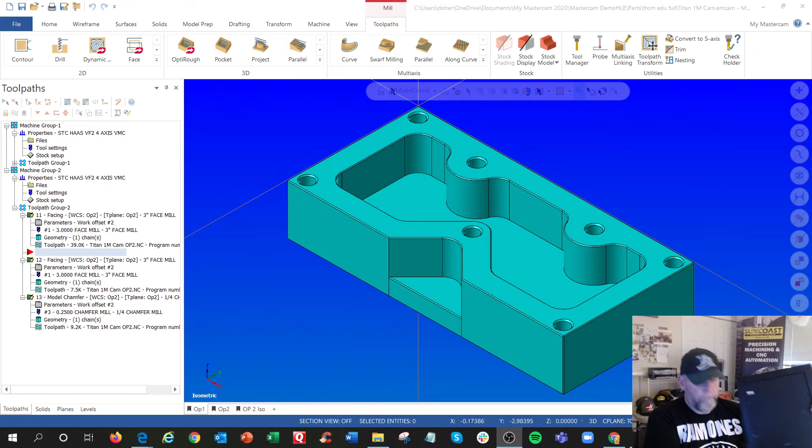I have a Tampa Bay Rays hat on. This is in the transition year when you're going from the Devil Rays to the Tampa Bay Rays. Anyway, you may notice my Ramones shirt. Big fan of the Ramones, seen them many times. Actually got a nice autographed picture, cover, Ramones. Got some other pictures up here. I'm also a drummer, got some Marky Ramone drumsticks right here. I'll do some drumming later.

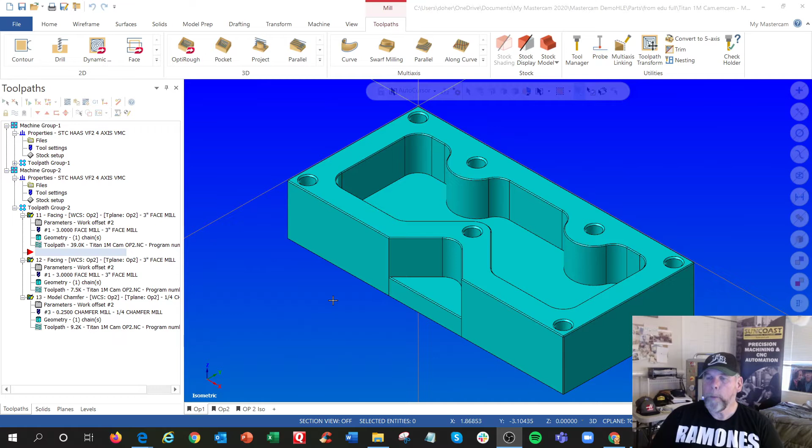But anyway, we're here to talk about machining. This is Mastercam Home Learning Edition 2020. I previously have done this and have a video before. I did the CAD, I did the CAM, and I was trying to do better simulation.

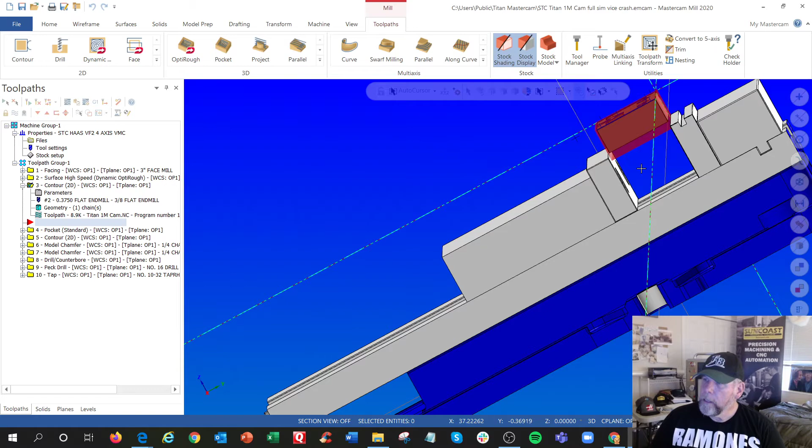So I brought in a vise. This is the actual Kurt 688 vise that we use in our school, D688. Took me a little while to figure out how to get the stock in the right place and the part in the right place, because I wanted to be able to do full simulation and talk about things you want to look out for.

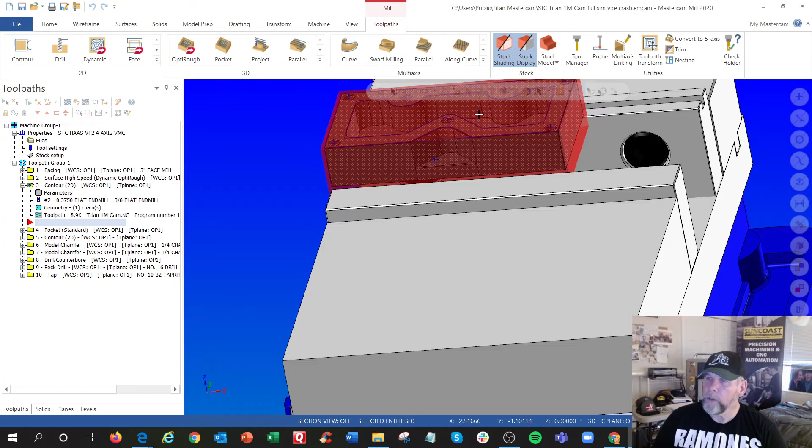In these simulations, you can really talk about what you're trying to do. This is the first operation, where you can see that the red material is the stock. We're just having a vise to hold it in there, and we throw it in the mill. We want to line up that jaw with the x-axis, which is pretty typical in a vertical mill.

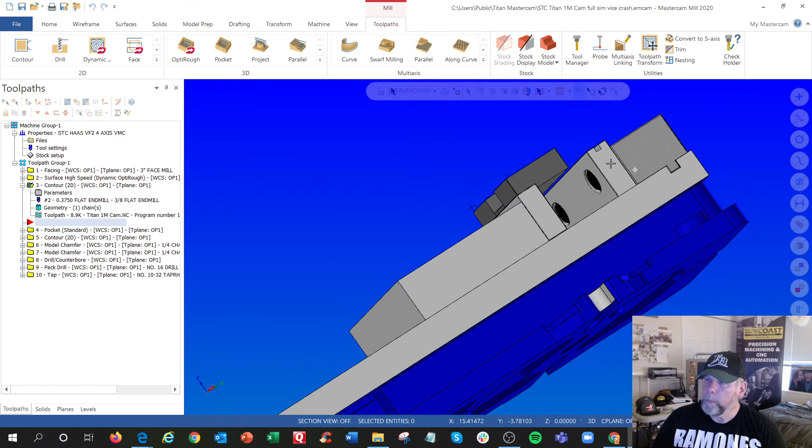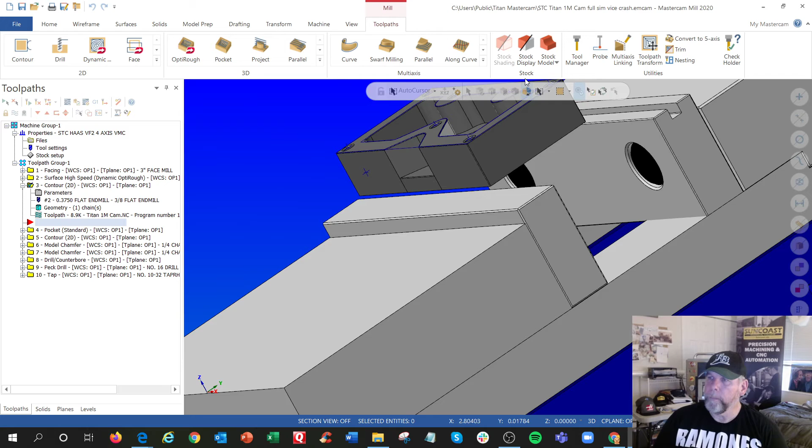In this case, the big transition from manual machining to CNC machining was that manual machine guys used to machine the whole outside and then work on the features. I forget the exact term for this, but we're using oversized material and cutting everything we can while holding on to the bottom. That is represented by this shaded material right here.

In Mastercam you set up those parameters right here, and you can put solid or wire frame just for reference and for simulation. On this one I used bounding box or all entities to get a rough idea of what size stock is, and I put some oversized material in here. I wanted it to be something you could buy in bar stock, 2 inch by 1 inch, which aligns with all the Titan projects, most of them. The extra 0.1 represents how much we're cutting off on a saw.

We shifted the x-axis, using this upper left corner. You can actually move it to any corner you want. Using the upper left corner, we're shifting it by 50, 50, and 20, and that would align with Titan setup sheets.

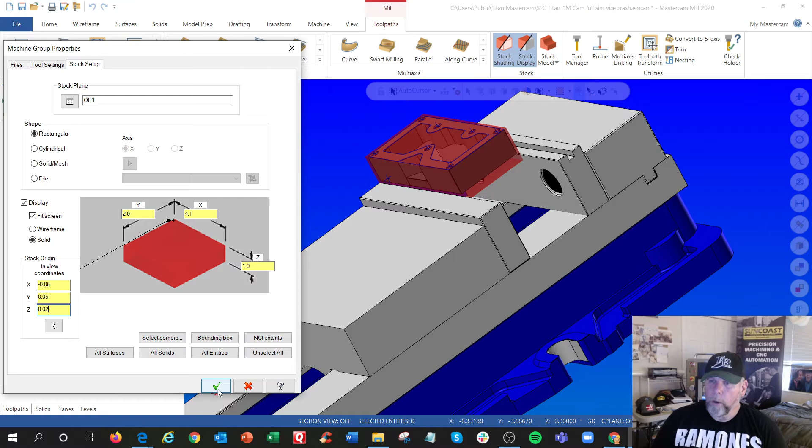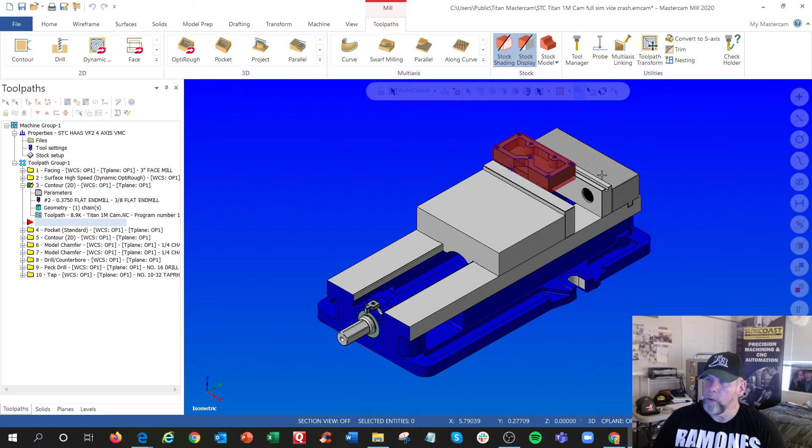So let's go back to this one. If you go back to the original, we're programmed off the model, or the solid model, and you're going to find this outside line with an edge finder or probe, and you're going to have to shift it in by 50 thousandths. But that's all on the setup sheet. However you program your parts in the future, you may do it differently. Some people program it so that you just do it off the material with no shifting.

So that really only applies on the first operation. When you get to the second operation, you have to be lined up with the finished product, or you cannot be that accurate. Okay, so I got the vise in here, got it all set up, and I was going to do some simulations.

So up in here we have backplot, verify, and simulate. I was actually trying to run this machine simulation over here because I was playing around with some 5-axis machining, and I don't have a 5-axis machine, but I want to learn, and you don't need a machine to learn it.

Backplot is like a quick simulation right up here, and there's a little press play button, speed button right here. Right now I only see one green stripe, which tells me I only have one folder clicked. So if I click all these, I get all operations. Let's try that backplot, which is also up here. Hit backplot, and then you see your face mill right there.

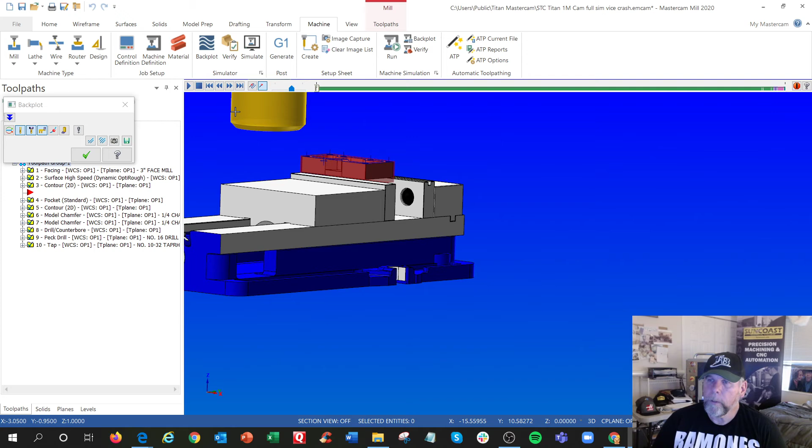I hit play, we start cutting away there, so we can look at it. This is like a quick way of looking at whether it's cutting in the right place. The yellow lines represent rapid movements. Looks pretty good to me.

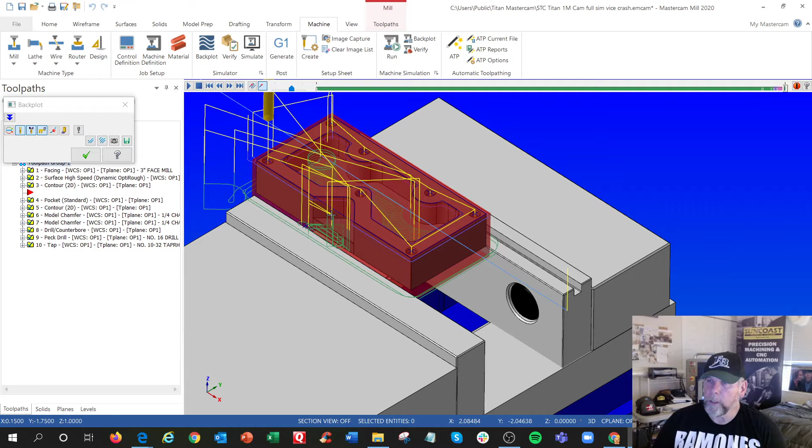This is pretty much what we used to do with just sketches or wireframe, no solid, in the old days. Now with solid models, you have a better representation of what it's supposed to look like. Only, is this a good setup? It looks like it's good.

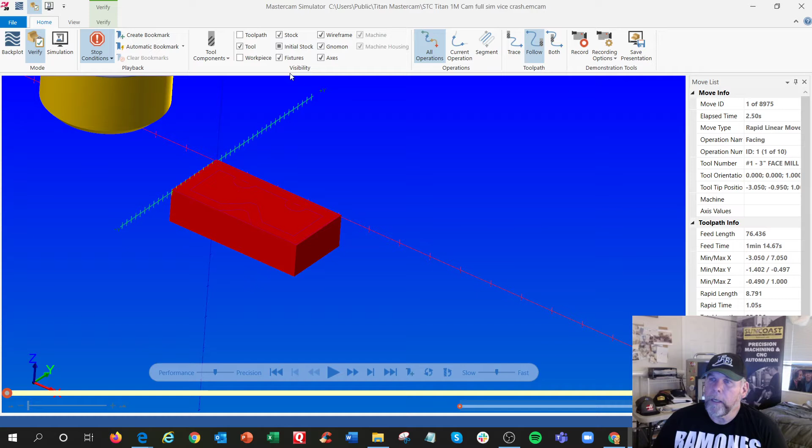So let's go to verification. Now verification will open up a separate window. I'll bring it over in the picture here. I have stock, tool, it says fixtures but I don't see it. Anyway, we hit the play button, and I'm going to turn on color loop, which will show colors for how long each operation takes, and they'll all have their own color.

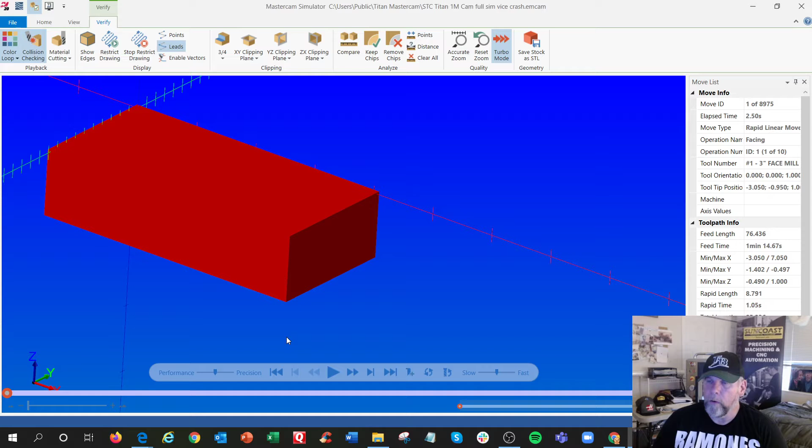All right, I have this set up. Let me turn off some of these stop conditions. Okay, I'm going to rewind this, hit play, let it cut, right?

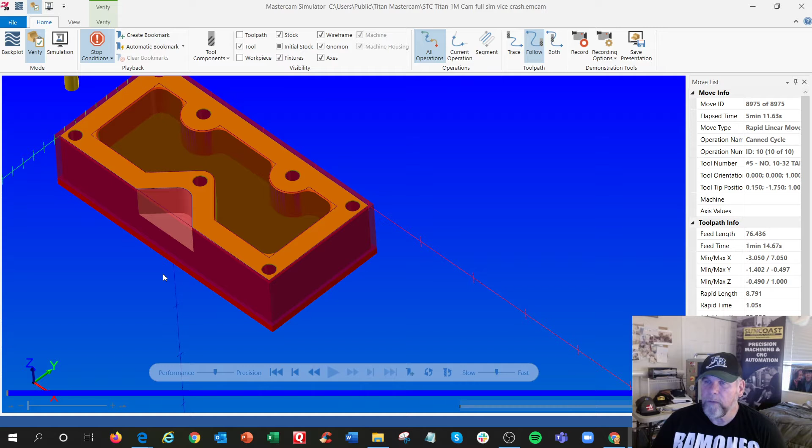You can see the wireframe boundaries, you can kind of get an idea. That was kind of fast, so let me rewind this and put the stock off. I'm going to slow this down, slow. Play again, okay, that's still pretty fast.

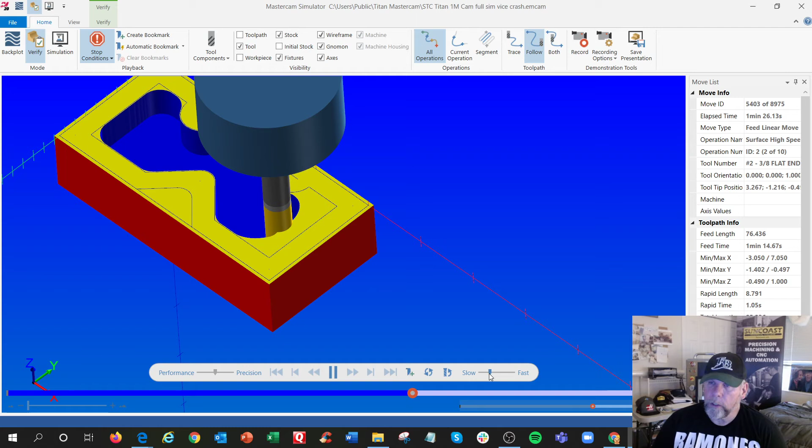All right, so you can really see much better how the cutting goes versus the quick verify method. You can actually see it's cutting. Looks pretty good. You can see down here the extra material, and when we flip it over we're going to be machining that off and chamfering it on this particular operation. Some operations may need more work.

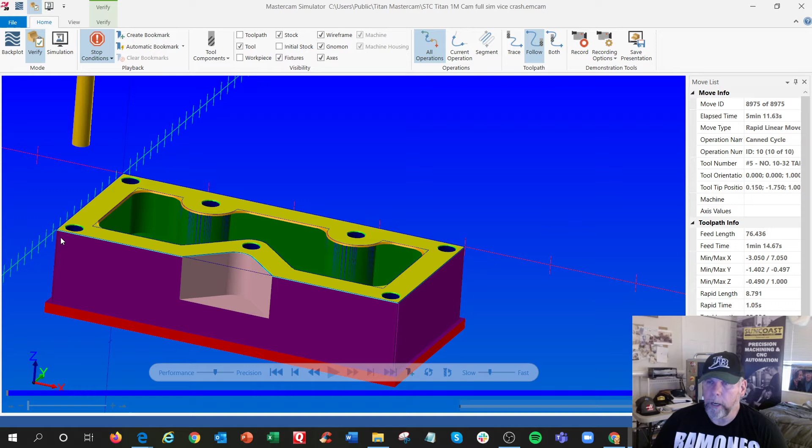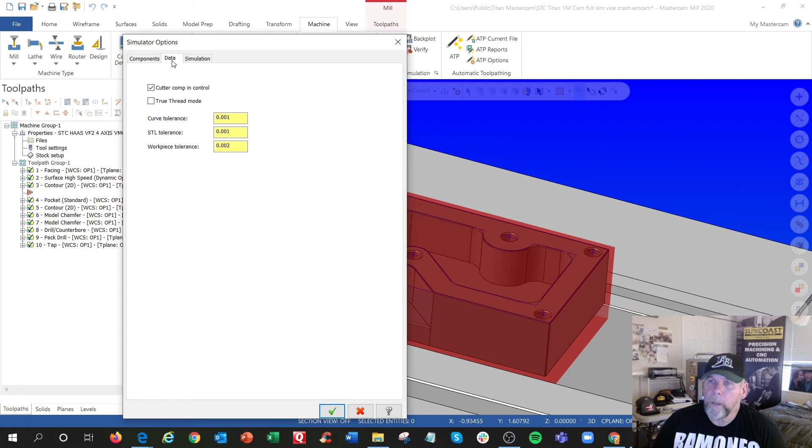Let's do a machine simulation. In this one you actually have to pick a machine. We picked this 4-axis VMC. I originally had a 5-axis in there for my other learning, so I picked this 4-axis VMC, cutter comp in control, and the fixtures.

Let me see, I've got to set some of this stuff up. Fixtures are gonna be, I should have combined all these levels. Bing, bing, bing. Oh, you know what, I could have done it an easier way, but I'm almost done. Done, okay.

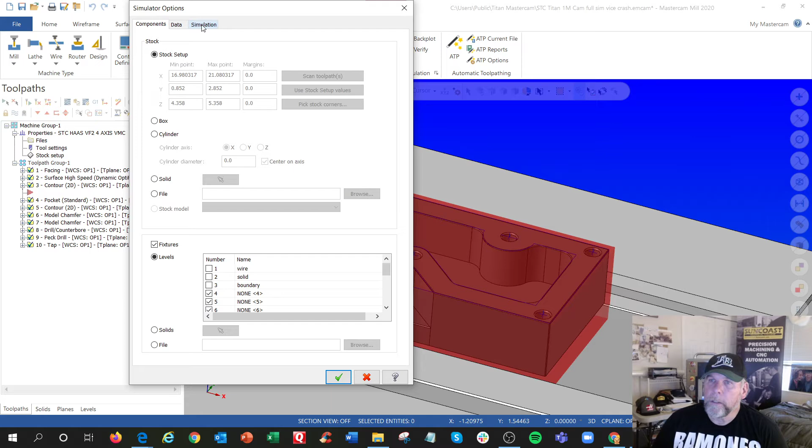What else do we want to have on here? Let's see all the settings. Data, simulation, simulate. Oh yeah, let me back this out a little bit, hit fit. All right, there we go. That's a whole machine right there with the vise and everything.

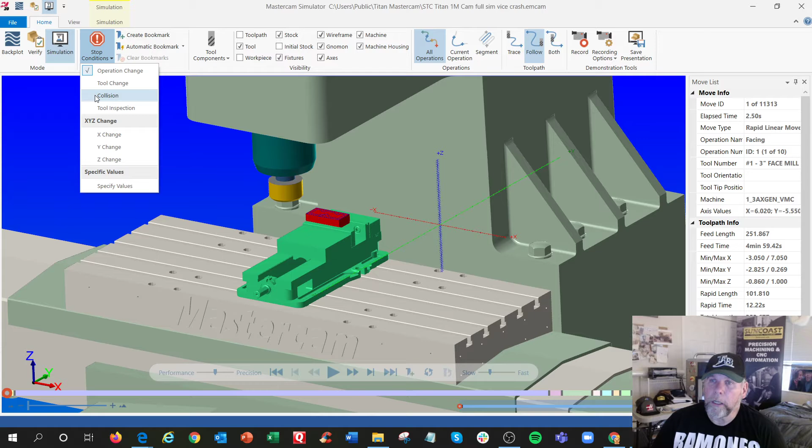And I'm going to turn on stop conditions. I'm going to do it for every operation, and collision. I want collision detection. I want to see if this actually works or not.

All right, so if I look way back here, this is a 3-axis mill, pretty typical, like a Haas VF2, without the covers on it. Obviously with the sheet metal you couldn't see much, but this would be your Z-axis that goes up and down, the table goes left and right and in and out. All right, we hit the play button, and there it goes.

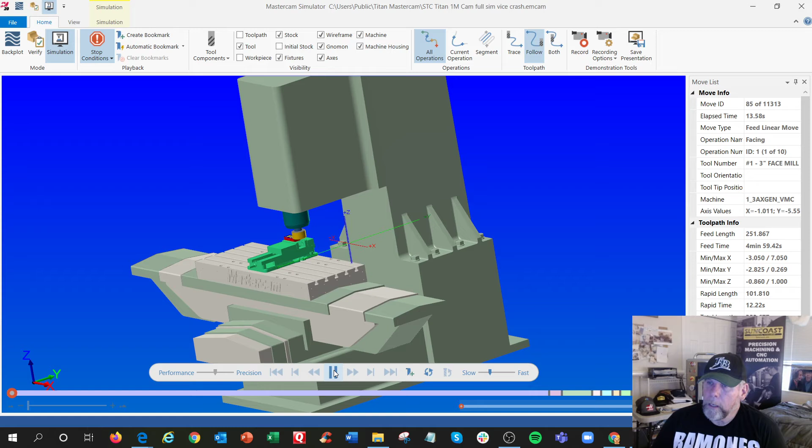And it paused due to stop conditions because it was an operation change. Okay, next operation would be this one. Can't really see it that much, let's get an up close view here. You notice that in reality, when you're watching CAD CAM, you're really watching the tool wiggle around and the part stays still. But this is actually what's really happening, the table's moving back and forth.

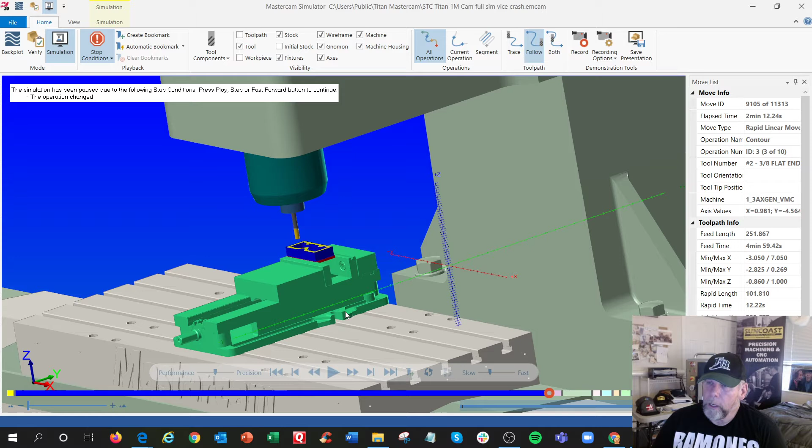All right, let's go to next operation. Ooh, that turned red. It says right here, a collision occurred. Oh crap, I thought I had everything right. What the heck is going on there?

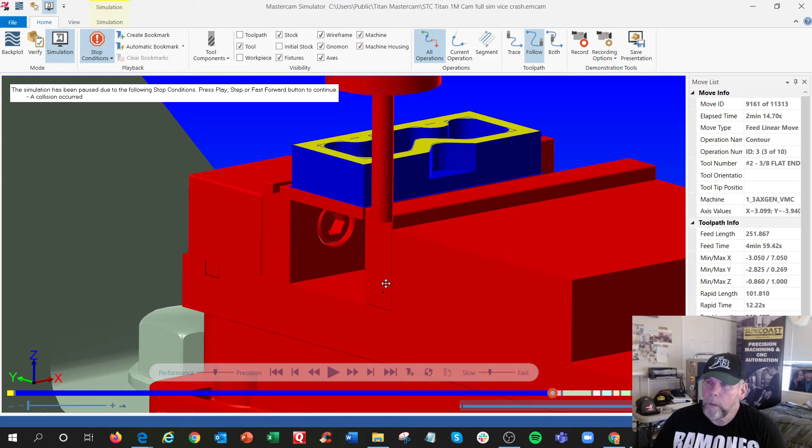That end mill looks too low. It looks like it's colliding with the fixture, the vise. This is something you want to be aware of because we're running pretty close here. I can see the previous cuts were just above there, and this one is too low. It's either settings wrong or something.

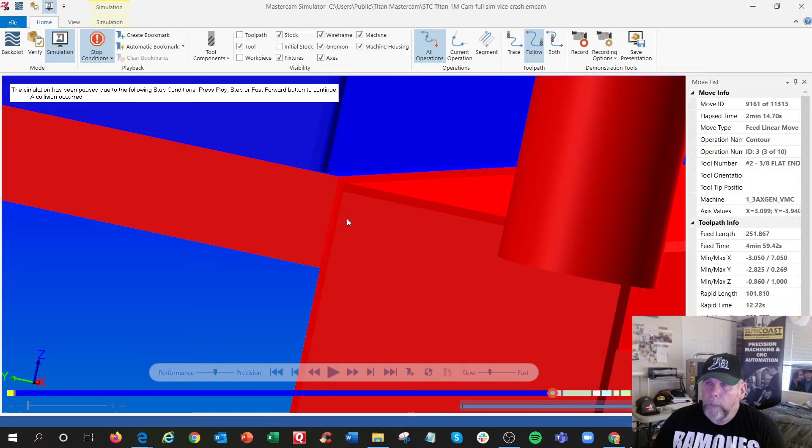But this is what you worry about because these are the hard jaws that come with the Kurt vise, this is the actual same model. We prefer not to use the hard jaws. We use either steel or aluminum jaws that we make, and we cut a little step in there, like 200 thousandths deep by 200 thousandths wide. So it's like having built-in parallels, but it's a known distance. In this particular case, the material is 1 inch tall.

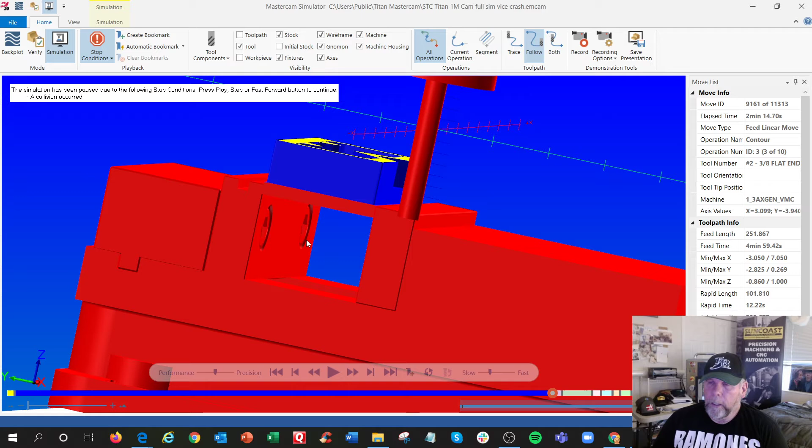We're cutting 750 or 760 plus 20 off the top, so that's like 780, which leaves about 220 left. If we cut this 200 deep, we'll be like 20 before we hit, which should be enough room. You want to make sure you've got enough to hold onto and cut around the whole thing. With parallels that could be daunting, because you're either not holding it by enough or you're holding it too deep, and something like this will happen. All right, let's go look at the numbers here.

I think it came, I should have checked, but I think it was in the contouring. It wasn't doing the floor. Surface high speed OptiRough was the roughing and facing, and then it did contour outside.

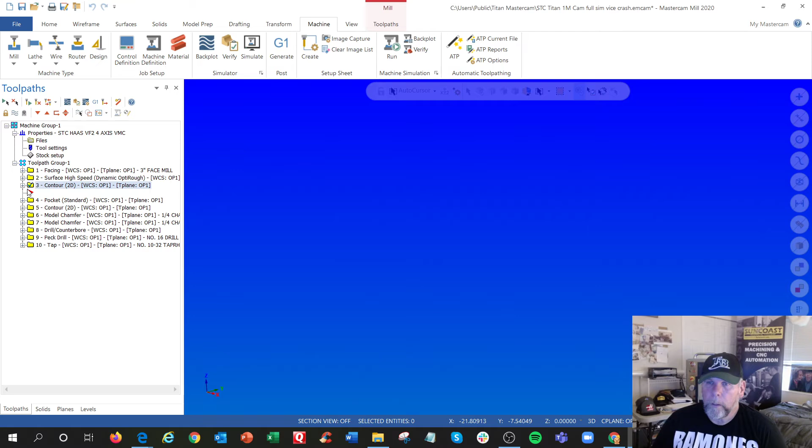Let me take a look at that setting, and let me zoom back up here. Okay, so if I turn this one on, this is just the tool path for that, and yep, it is too low.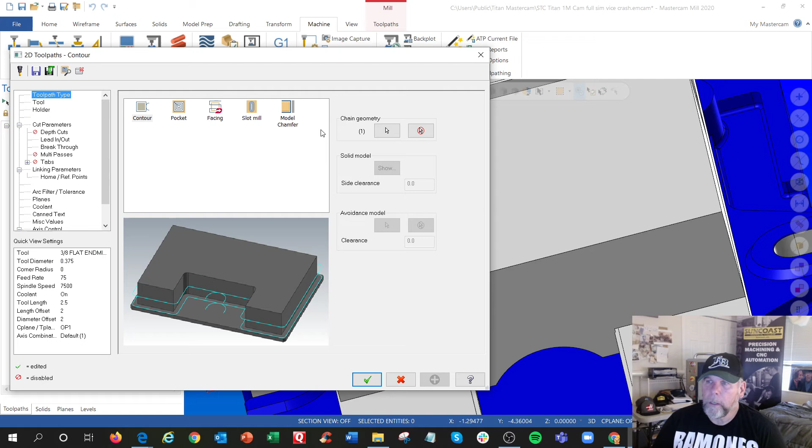Let's look at the parameters here. Tool path, chain geometry. This is what we're picking, which is right here. You can see right there the green. This means stay to the outside, and that means go in this direction.

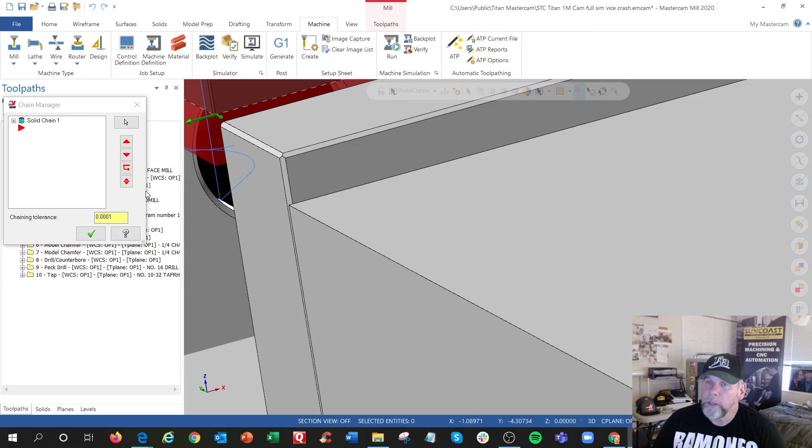All right, that looks, the chain looks correct. It's above the fixture. Okay. We got the 3/8 tool, cut parameters, wear compensation, which is going to give you your G41 cutter comp.

Stock to leave on the floors, and nothing. We have no depth cuts. Lead in and out looks good. Breakthrough, ooh. Oh, we're adding 10 thousandths.

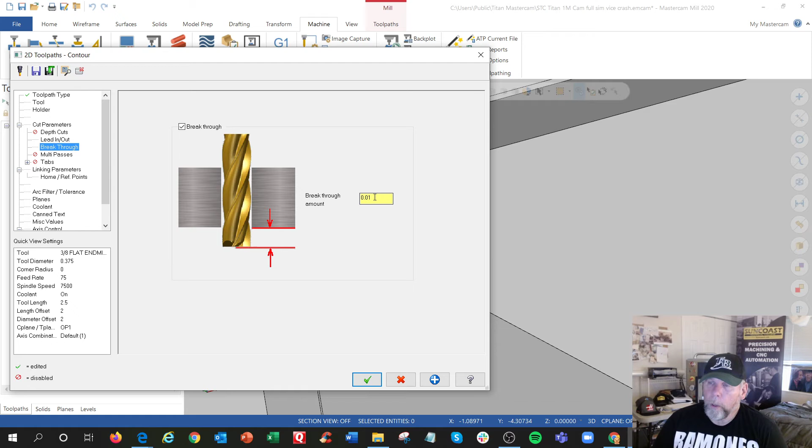That shouldn't do it. All right, multi-pass is for multiple outside cuts. Linking parameters, we got all this in there. Oh, this one right here.

So incremental means incremental to whatever selection you made. And the selection we made was that boundary. So this is adding another 100 thousandths to it.

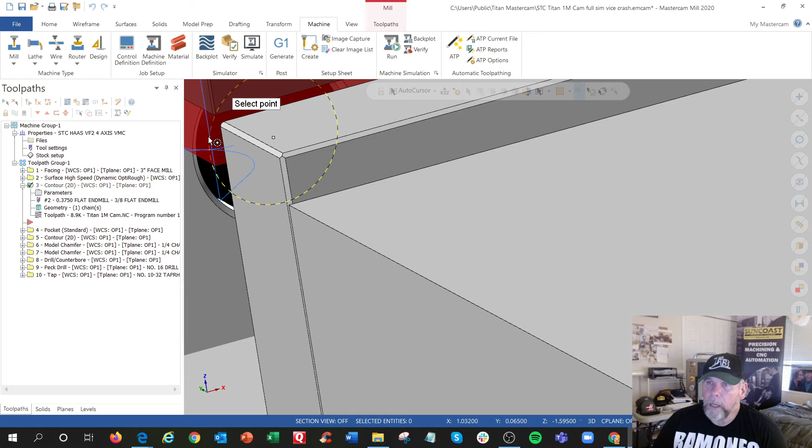One way of fixing that is to delete this and pick, if you actually click on this, it'll actually bring you back to the model again. And you can reselect the boundary, which is

Right there. Yeah, right there. And we don't add anything to it. And I think associative works the same way. The other way you can do it is absolute and put in a hard number.

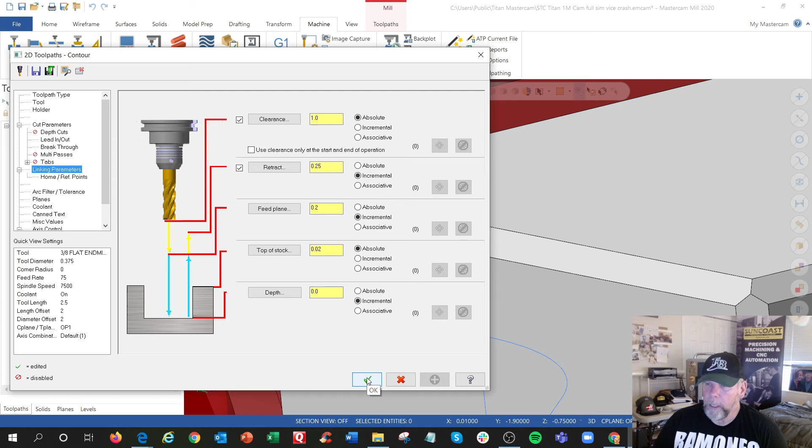Let's just try that one though. All right, blue is applying and green means I'm done. And red X means you need to regenerate the code. So I gotta regenerate the code.

And I'm going to take a look here. I'm really zoomed up here. Let me zoom out here. And I think it's above.

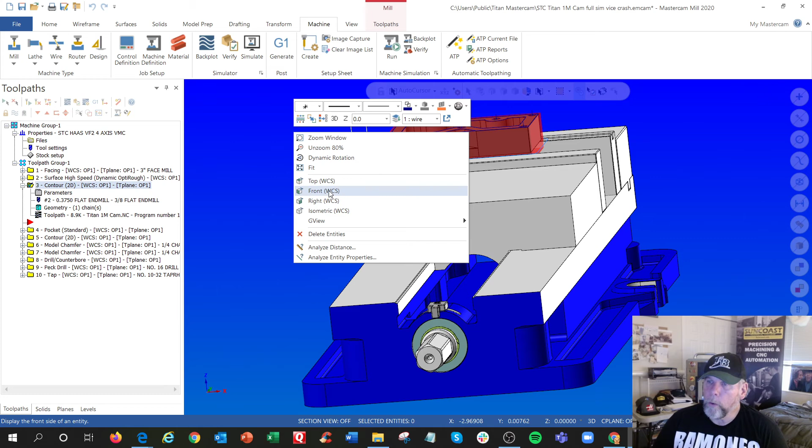Oh, I think it's fixed now. I'm going to hit the fit command. I'm going to hit the isometric. Okay, let's go back to the full Monty of simulation.

And I'm going to zoom in on this area again. Okay, let's hit the play button. There we go, cuts the top. Ooh, it should be over here.

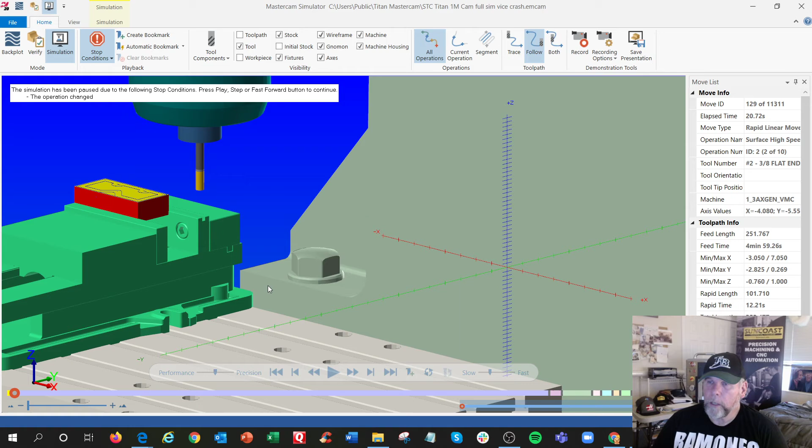Forgot that table's gonna move. All right, cut them inside. Table wiggling around, yep. It's kind of impressive that a CNC machine, all this heavy stuff is controlled by motors and very fast.

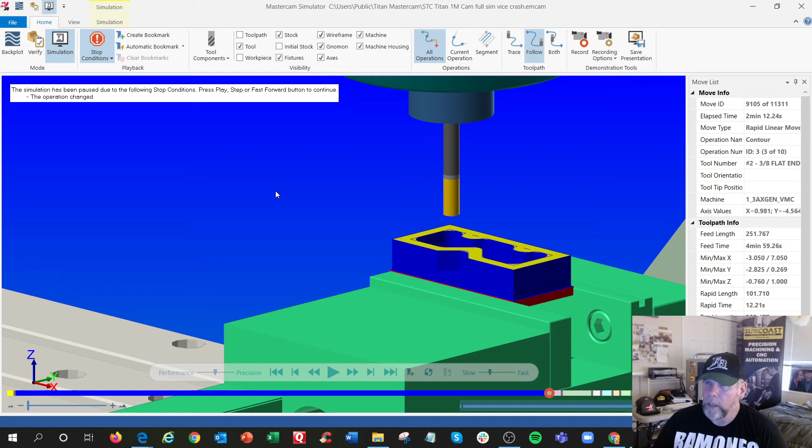Oh, there it is. That would have been right after this cut here. That's when we had the problem. And now it makes it. It made it just fine.

See, it's close. But close only counts in atomic bombs and hand grenades. So, okay, here we go.

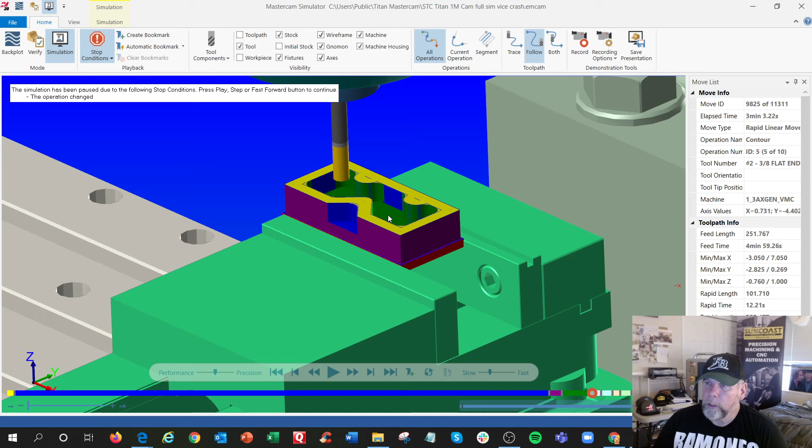And apparently, let's see, that was the floor. We did the floor, and we're gonna do that wall, and then chamfering, and

And more chamfering. Oh, I got the wireframe. That's why it's not looking right. That's like the original build.

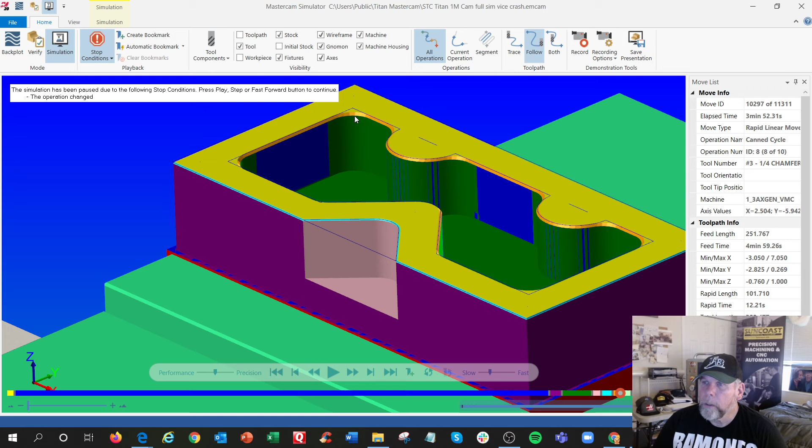And there you go. And then drill the holes. You can see right there, they're going up and down and going up and down.

So let's go back a couple operations here. You watch it from out here now. This is what's really going on with the machine.

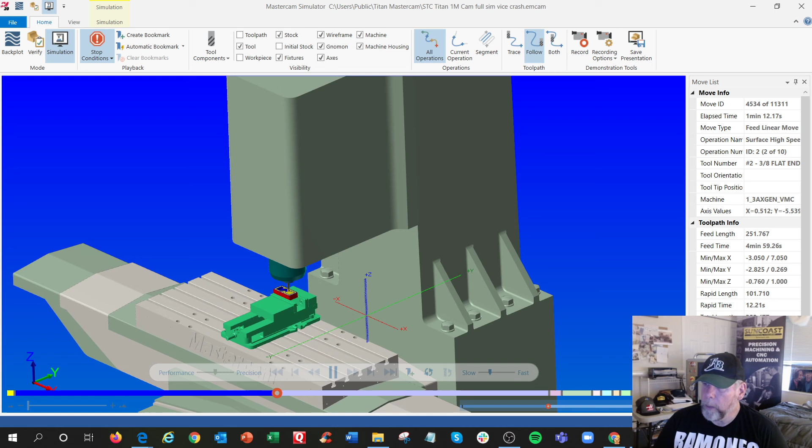The roughing is the longest part of the program, but right here is total time, 5 minutes, just over 5.

Next operation, next operation. Of course, it doesn't show tool changes because.

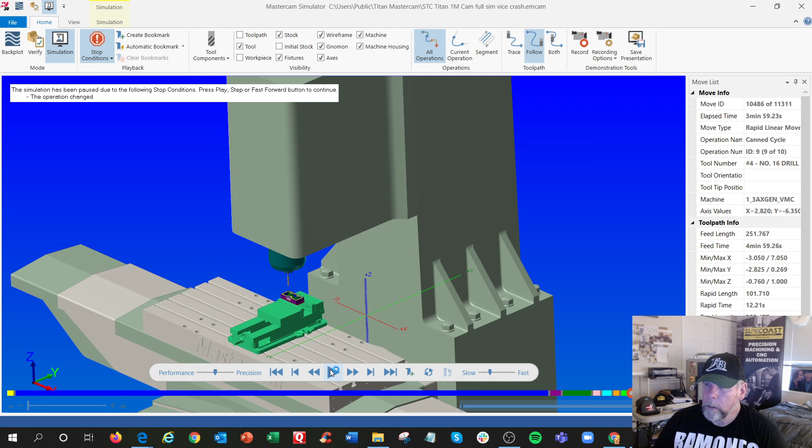And then drilling, zoom up again, and then tapping. Done. Okay. I think that's a real good close as you're going to get without machining the actual part to know that your program is going to work correctly and without crashing into stuff.

Of course, setup is critical, and how you set your coordinates up. If you're probing or edge finding, if you're doing some math, shifts and stuff like that, you got to take that in consideration.

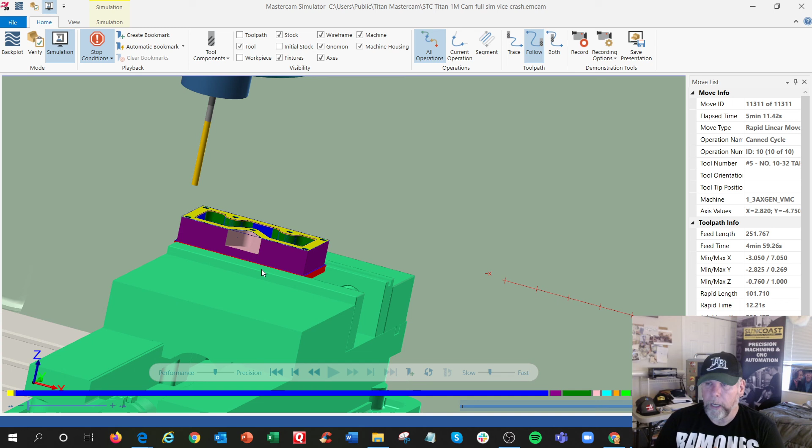At our school, we run it, we put it in the graphics in the control, run it through there once, make sure we get no alarms or weird stuff. We'll shift it 2 inches up in the air, run it up in the air, just to get a visual view of what we think it's going to do, and then we'll take the 2 inches away.

And we'll just let it eat metal. We'll single block down every tool just to verify that it looks like the heights are correct, or the distance to go numbers are correct. So we have very good success doing that.